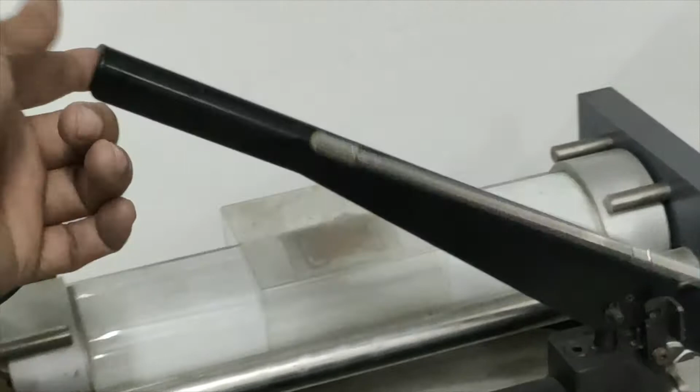What we do is pressurize this cylinder. It is not visible right now, but you can see that here there is a cycle pump type of piston. By operating this handle, we can pump in the air and pressurize the cylinder. So it becomes a pressure vessel subjected to internal pressure, and that pressure can be measured on this dial gauge. So you know the pressure and the diameter of the cylinder, and then you can easily find out the tangential or hoop stress and the axial stress.

That is theoretically. But experimentally, on this cylinder we have strain gauges placed in the axial direction as well as in the tangential direction. From the strain gauges you can measure the strains, and from the strains you can find the stresses using the stress-strain relations. Then you can compare the theoretical values of the tangential and axial stresses with the experimental values, and come to know how accurate the thin pressure vessel formulas are, because those formulas are extremely important in the design of thin pressure vessels.

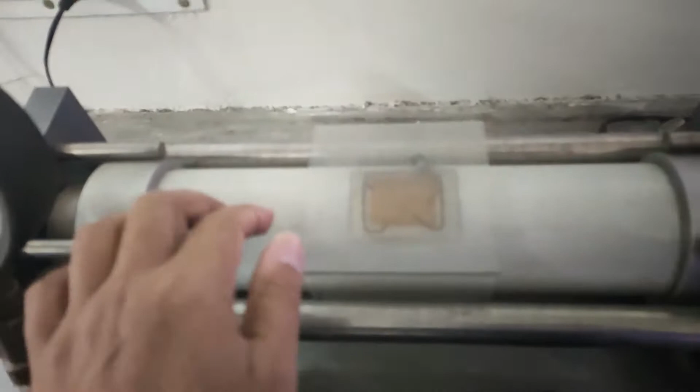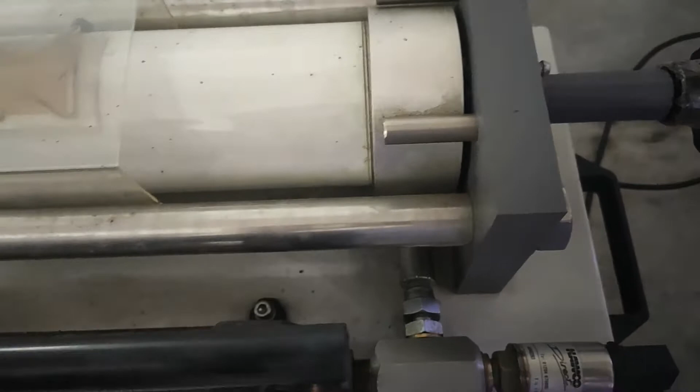The introduction and main description is like this. All engineers need to know how to predict the effects of stress on common shapes. They can use this information to decide the right type of material and thickness of materials for their own design and drawing for practical works. This thin cylinder shows students the strains in the surface of a thin wall cylinder when it is under stress from an internal pressure. This arrangement is similar to many real world applications including pressure vessels, pressure pipes, aircraft fuselages, compressed gas cylinders and many more.

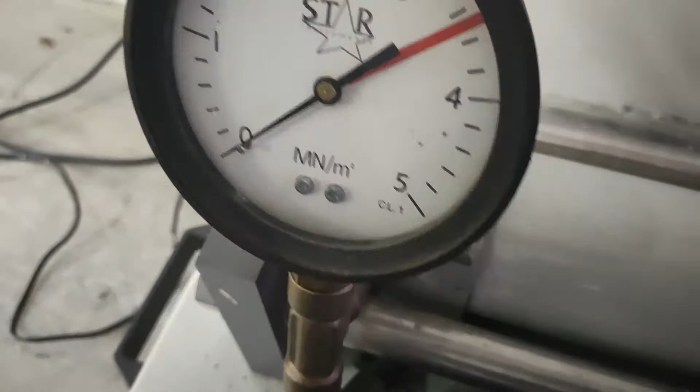In this thin cylinder application, students will learn a biaxial stress system, the use of strain gauges, Young's modulus, Poisson's ratio, and construction and use of Mohr's circle. So this is the setup. This is the thin cylinder, and this is the rigid metallic frame. These two rods are there. This is the wheel; we can lock it and unlock it.

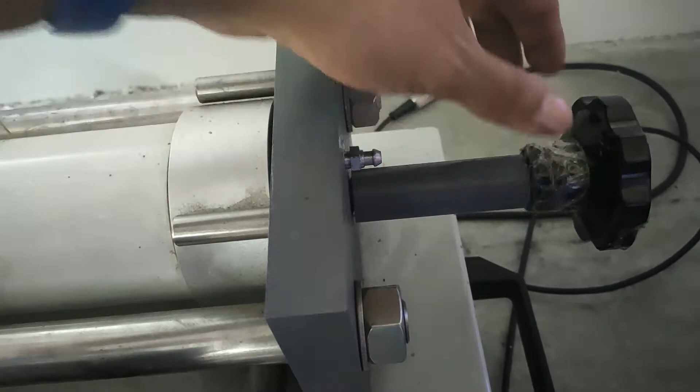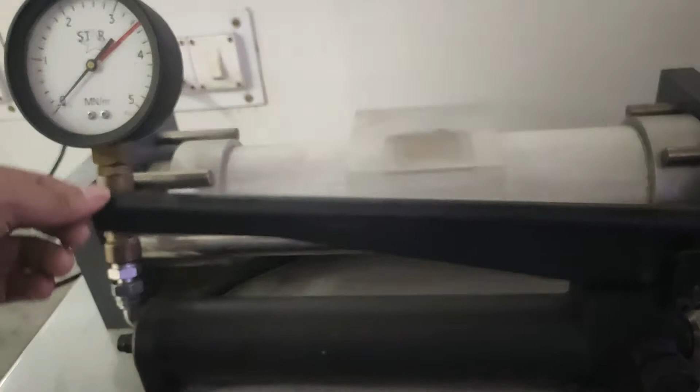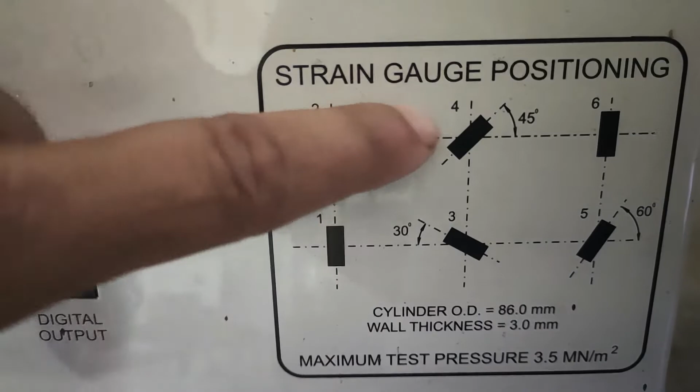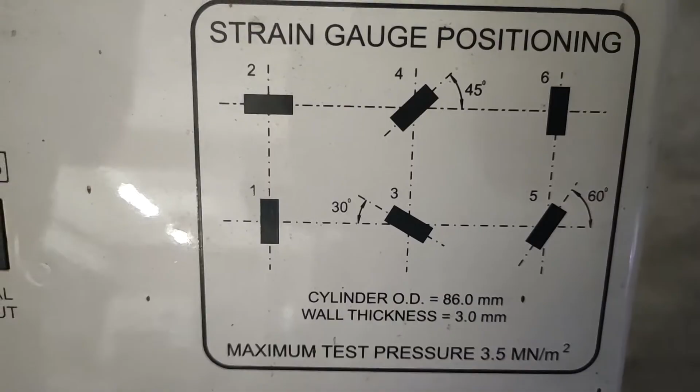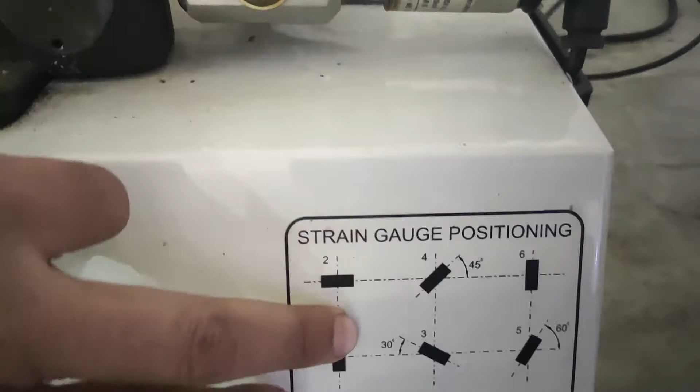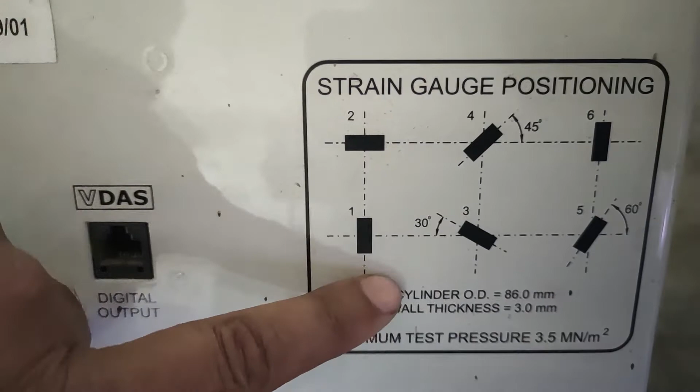These are actually the strain gauges. A total of 6 strain gauges are there at different angles and positions. This one is the first strain gauge, and the same locations are shown here: first, second, third, fourth, fifth and sixth. All strain gauges are put at different positions and angles. This one is put vertically, this one horizontally, this one at a 45-degree angle from its axis, this one at 30 degrees, this one also vertical, and this one at 60 degrees.

So here we can directly read the strain gauge values. This is the toggle button. Up to 6 strain gauge readings will appear here: 1, 2, 3, 4. Then if we click down, we get the 5th and 6th strain gauge readings.

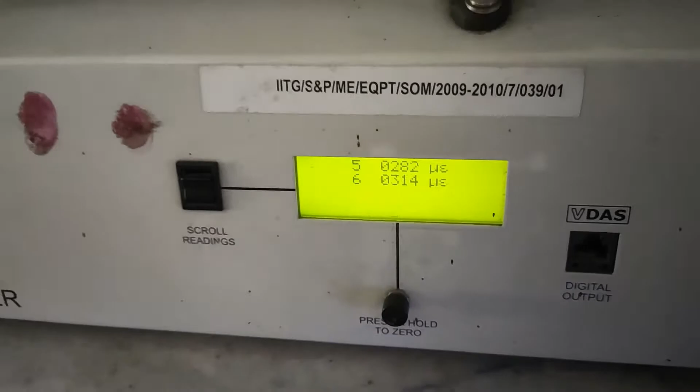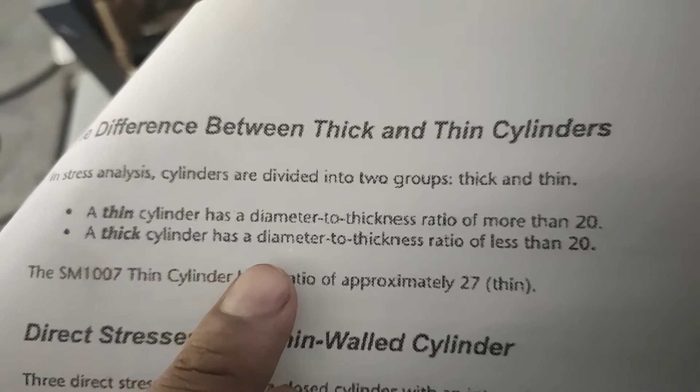Thin cylinder experimental setup and thick cylinder experimental setup are also available. What is the difference between thick and thin cylinders? A thin cylinder has a diameter to thickness ratio of more than 20, whereas a thick cylinder has a diameter to thickness ratio of less than 20. So this is the thin cylinder, model SM1007, a UK-made instrument.

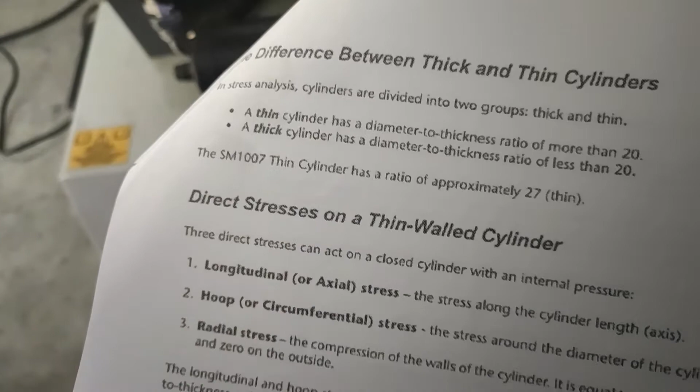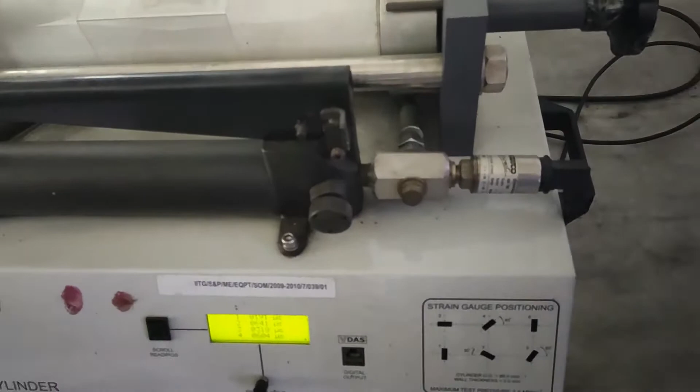And now we will go for the actual experiment. This can also be connected to a PC, but without connecting a PC we can also perform the experiments. For doing the experiment, first we need to open it. First we need to switch on the machine, switch on the power. After switching on, we need to wait for at least 5 minutes. We have already had more than 5 minutes. Now, after 5 minutes, there is no internal pressure inside the cylinder, 0 pressure.

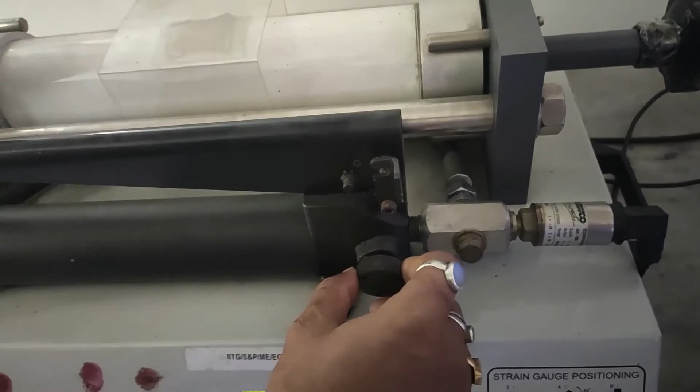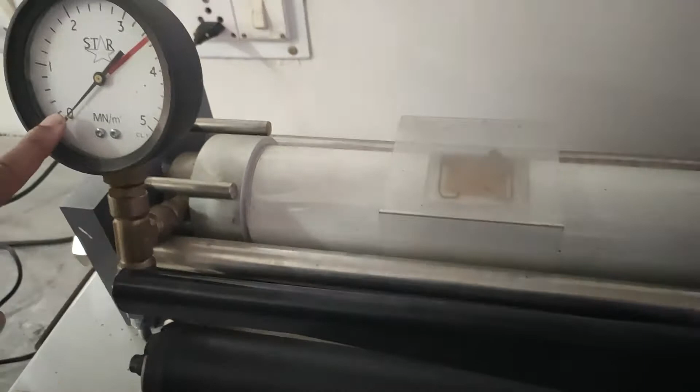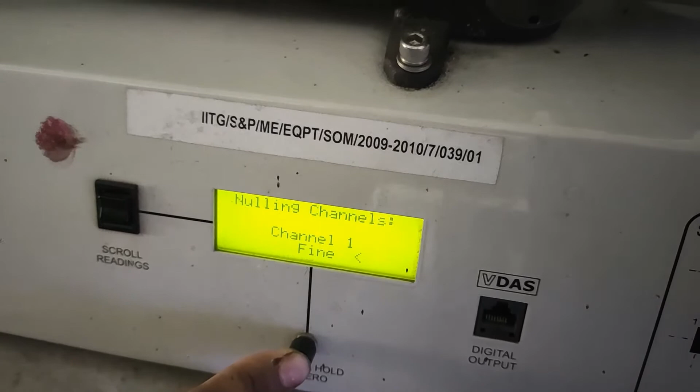This is the knob where we can give the opening of this hydraulic pressure. Now it is in closed condition. Now we will make it open, and then before starting, at the 0 condition, 0 pressure in meganewton per meter square, we will make all strain gauges 0. Some arbitrary value is showing. For this we need to press this button for a few seconds. Now it is nulling channels, meaning balancing. There are some arbitrary voltage signals; it will balance those, calibration is going on.

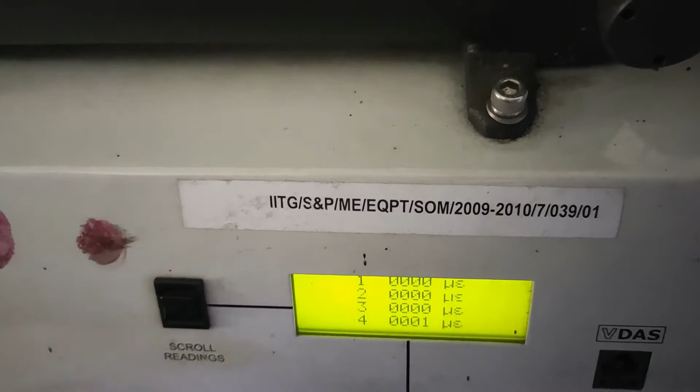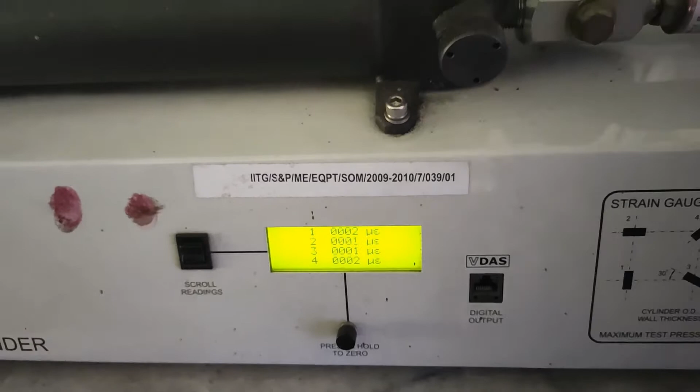So once we do the calibration, now this is the initial condition. As these signals are voltage signals, there are small fluctuations; the voltage will never be 0. So some arbitrary value will always appear here, in microstrain. Now the next step is, as I told, there is open condition and closed condition. Two ways we can perform the experiments. But in our class experiments we are giving only the open condition. For open condition, we need to loosen this knob, turn it anti-clockwise, then it will be in open condition.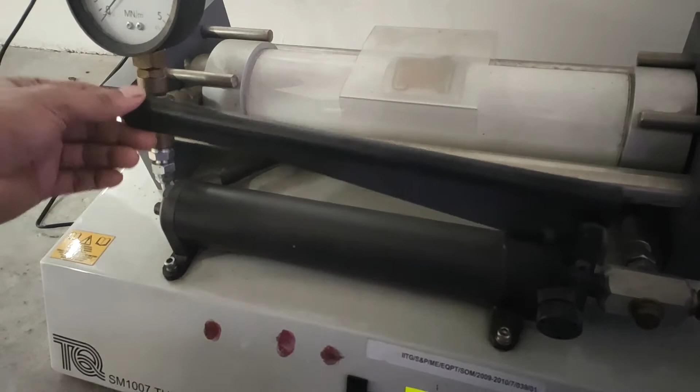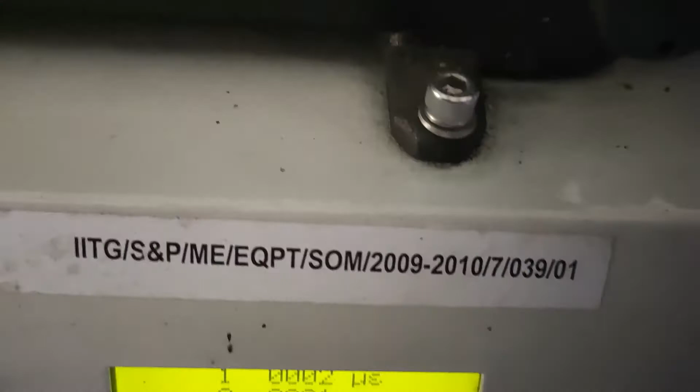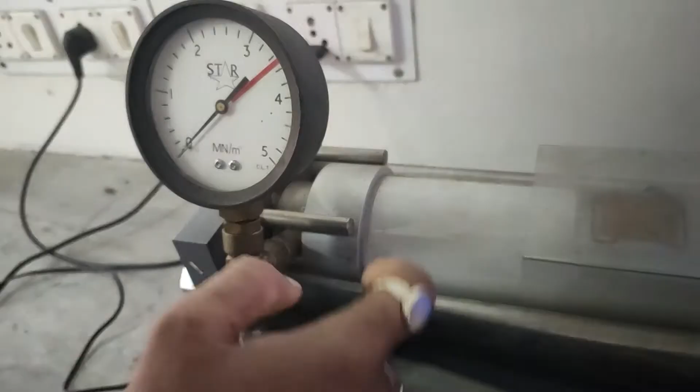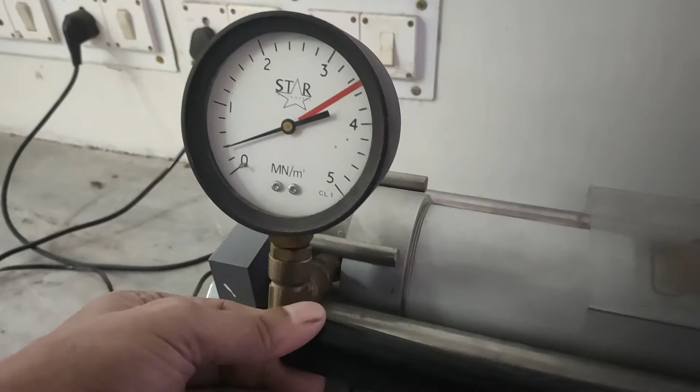Then if we put the hydraulic pressure, pressure will be developed inside the cylinder, and it will give internal pressure on the cylinder wall. Due to that pressure there will be some deflection, which will generate strain. That strain value we can read from this display. So now gradually I will put hydraulic pressure inside the cylinder. At different intervals, initially at 0, we will take the reading, and the full scale on this pressure gauge is up to 5 meganewton per meter square.

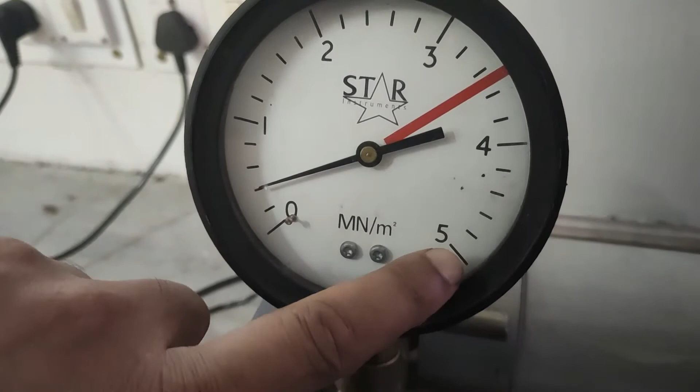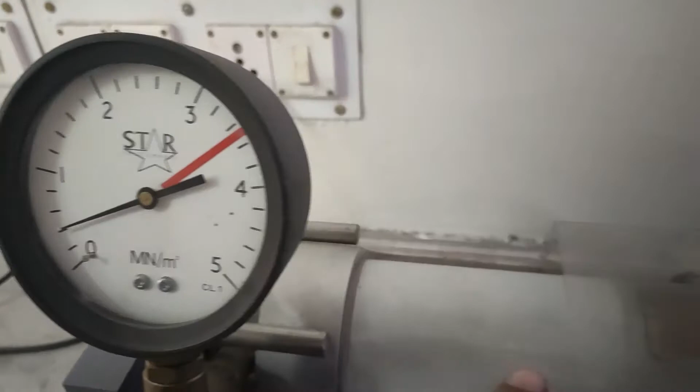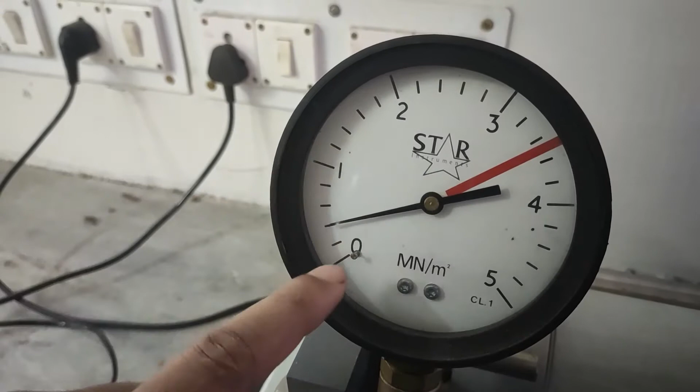But in this experimental setup there is a limitation. You have seen this red mark. One should not put pressure above this red mark, otherwise the cylinder will be permanently damaged and the strain gauges will also get damaged. So we will put pressure up to 3 or 3 point something. 2, 4, 6, 8, 10. So like that, this is the scale.

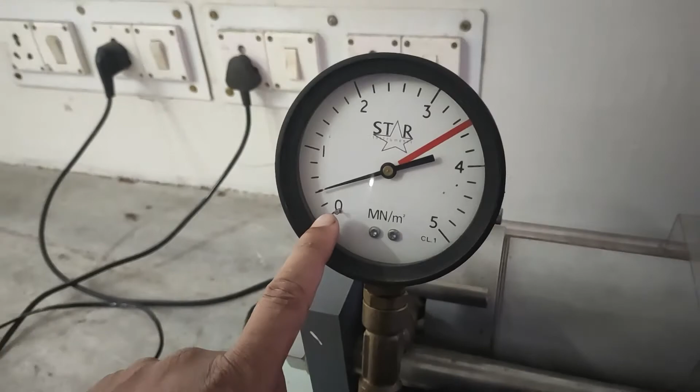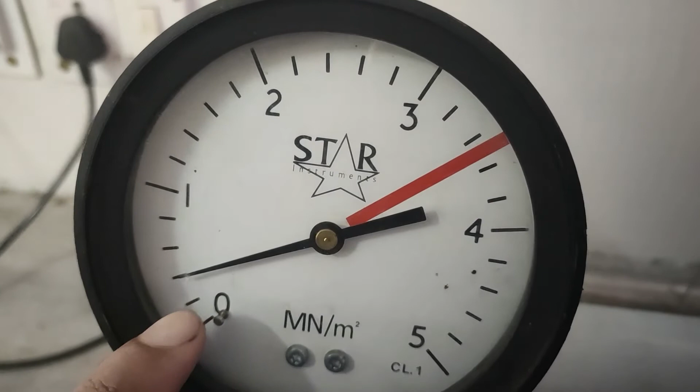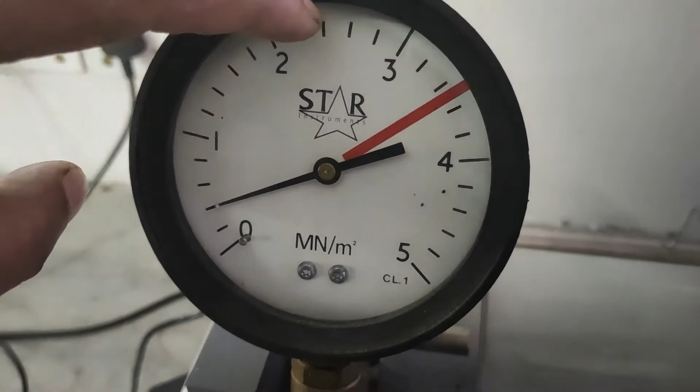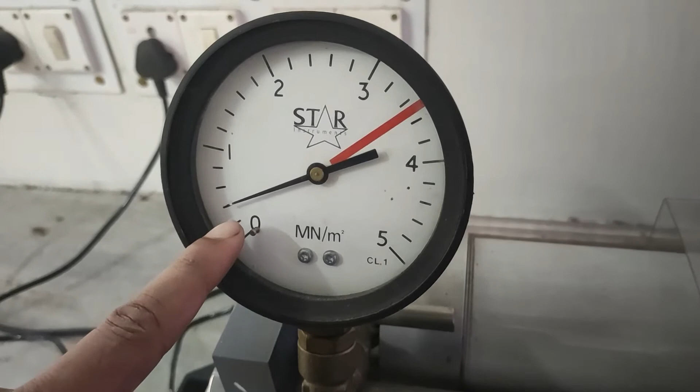So first, initially, we will take the reading at 0. At 0 we will measure the strain values and note them down. Then each division equals 0.2 meganewton. So 0.2, 0.4, 0.6, 0.8, 1, then 1.2, like that it increases. We will put pressure up to 3.4 meganewton per meter square. Initially you can give 0.2 or 0.4; we will give hydraulic pressure by using this pump. Then we will take the reading.

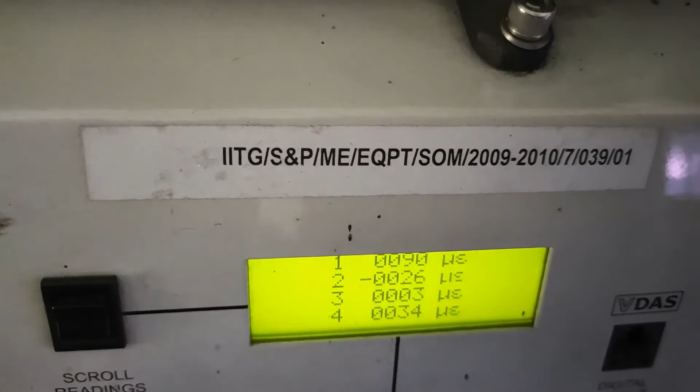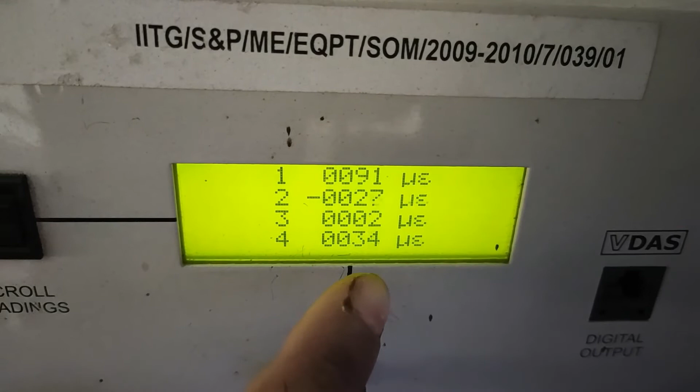So the first strain gauge reading is 92 microstrain. This is positive, meaning tensile strain. The second one, this strain gauge, is negative. This is compressive strain. The third one is 3 microstrain. The fourth one 35 microstrain, the fifth one 64, and the sixth one 95. Positive means tensile strain, tensile loading, and negative means compressive strain, compressive loading. So at different pressures we will note down the readings, and from these readings you need to do the rest of the calculations.

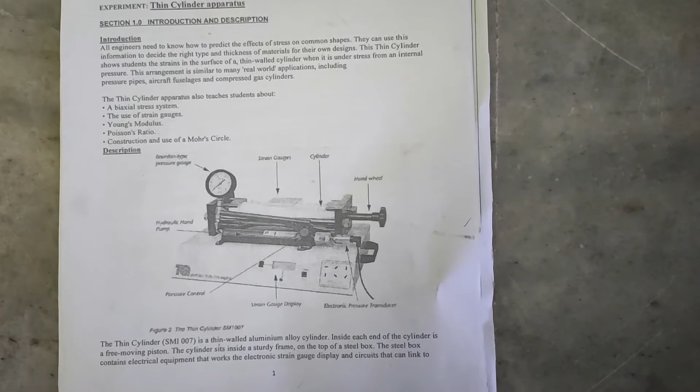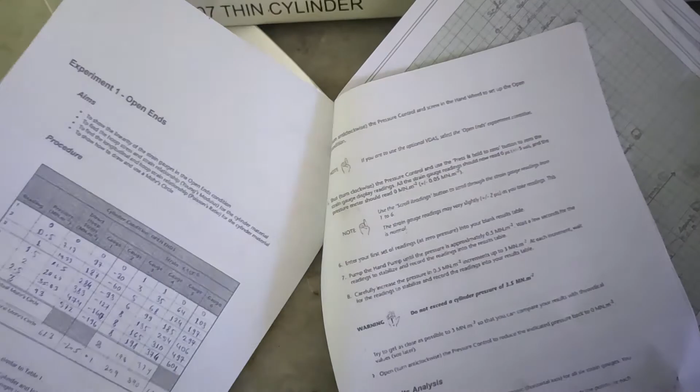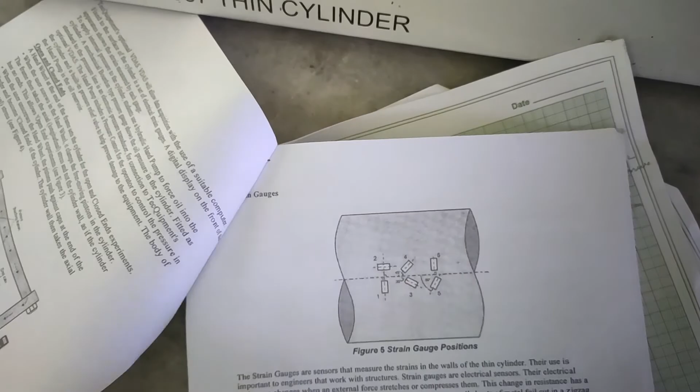We will provide you all the experimental manual details, and in the manual all details, formulas, theory, everything will be mentioned, and in this table you need to put whatever readings you get. This is the theory manual. These are the open ends condition, closed ends condition, and this one is the cylinder. This is the drawing, and these are the strain gauges. This is the data acquisition system, and these are the technical details of this experimental setup.

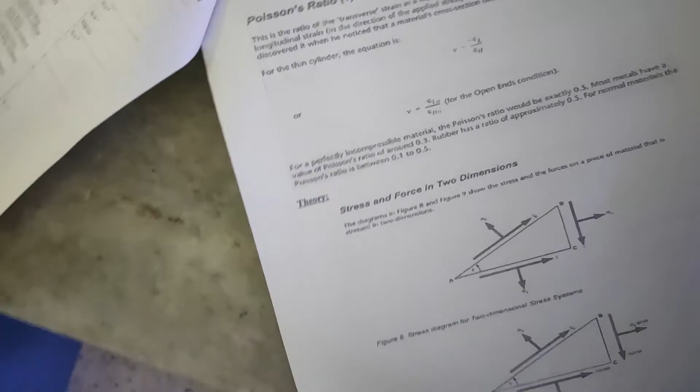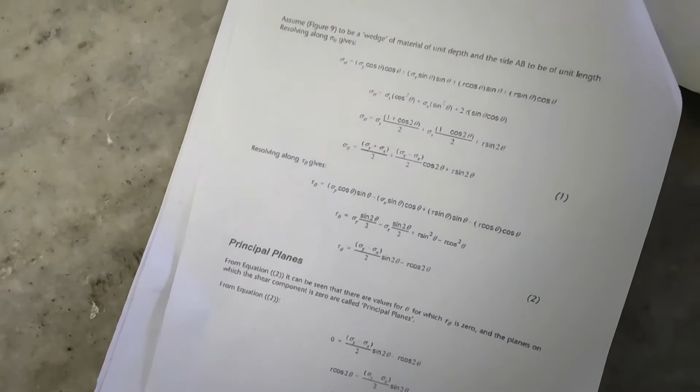Then this is the theory: Poisson's ratio, Mohr's circle, stress, strain, all details are here. Everything will be provided. We will provide you a soft copy, and you need to do the rest of the calculations using the formulas.